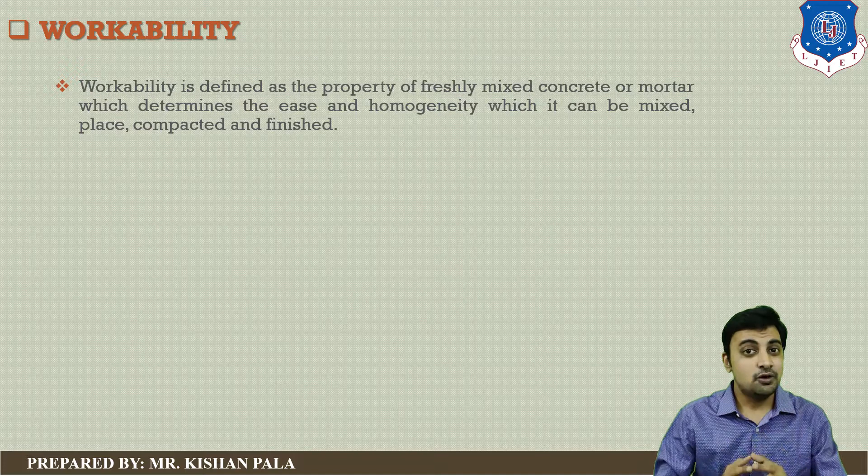Here you can see on your screen what is workability. Workability is regarded as a fresh property. Workability is defined as the property of freshly mixed concrete or mortar which determines the ease with which it can be mixed, placed, compacted and finished. Now let us understand the factors affecting the workability of the concrete mass.

There are many factors affecting the workability of the concrete mass. Let us discuss them one by one in detail. We will start from water content.

Water content is one of the important factors affecting the workability of concrete, because adding water gives you higher workability. But if you talk about the strength of the concrete, increasing the water content beyond a certain amount has a negative effect on strength. So we have to be careful adding more water to achieve higher workability, because this will affect the strength of the concrete mass. With increasing water content, you get higher workability but decreasing strength.

Second factor is mix proportions. The mix proportions of all ingredients in different ratios affects the concrete mass. For example, taking the aggregate-cement ratio: if you use a high aggregate-cement ratio, you get low workability, because workability is directly related to the particle size of the aggregates and the arrangement of all ingredients in the concrete mass. So increasing the aggregate-cement ratio gives low workability. If we take a low aggregate-cement ratio, meaning a rich mix, you will get higher workability. So mix proportions of all ingredients affect the workability of the concrete mass.

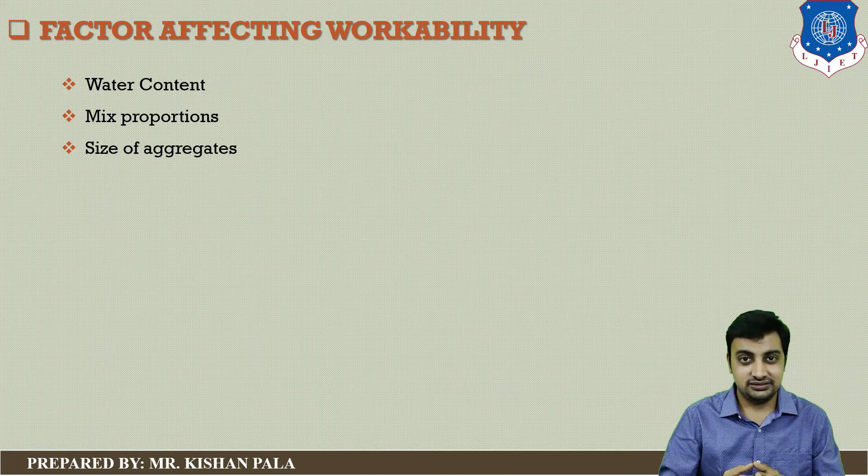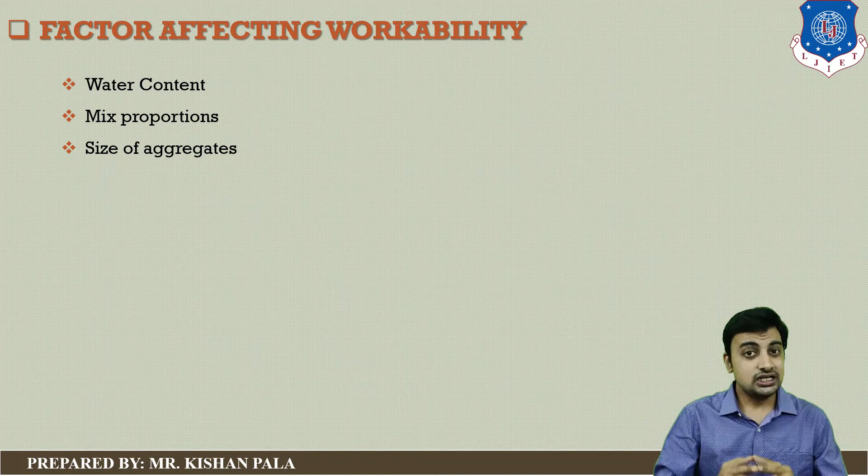For example, if we take a lesser size of aggregate, it has higher surface area, meaning it requires more water, which gives you lower workability. On the opposite side, if we use a larger size of aggregate, there is lesser surface area, requiring lower water consumption, giving higher workability. So the size of the aggregate affects the workability of the concrete mass.

But if you want high workability, you can use a composition of different sizes of aggregate, and you will get the best composition of the concrete mass, giving higher workability compared to a normal mix.

Next, if we talk about the shapes of aggregates, we have different shapes available: rounded aggregate, irregular aggregate, angular aggregate, flaky aggregate, and elongated aggregate. These affect the fresh property, or workability, of the concrete mass. If you use rounded aggregate, this gives high workability, but if you use angular or irregular shaped aggregate, that gives lesser workability compared to rounded aggregate.

There is an issue related to bonding with rounded aggregate. If we use rounded aggregate, the bonding will be less, and less bonding gives lesser compressive strength. So for higher workability we can use rounded aggregate, but we get low bonding strength of internal particles and won't get high compressive strength. So in high strength concrete we cannot use rounded aggregate, but we can increase workability by using rounded type aggregates.

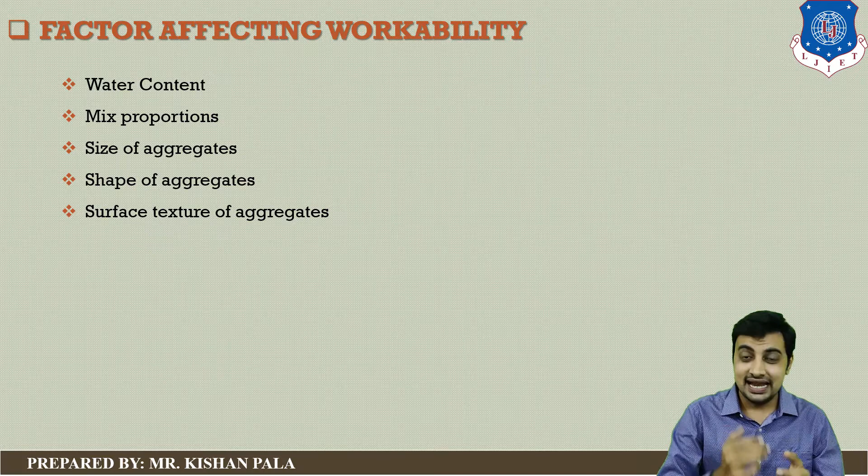Next point is surface texture of the aggregates. The surface texture affects the water requirements of the concrete mass. We have mainly two types: glassy and rough texture. If we use glassy type texture, the concrete mass requires less water consumption, and the internal friction of the aggregate will be less, giving higher workability. On the opposite side, rough aggregates require high water consumption, and the internal friction will be high, giving lesser workability of the concrete mass.

Our next topic is grading of aggregates. With proper graded aggregate, you can increase the workability of the concrete mass, because lower particles will fill the gaps of higher particles, and further fill the smaller particles. So the bonding of the composition will be good, and you will get higher compressive strength as well as higher workability. So with proper grading of the aggregate, you get higher workability as well as good hardened properties and high durability of the concrete mass. Proper grading should be considered while mixing concrete.

Next point is use of admixtures. Nowadays in construction we have lots of admixtures available, like plasticizer, super plasticizer, and others, and pozzolanic materials like fly ash. You can utilize these materials and get high workability along with high compressive strength, which is also beneficial for the durability of the concrete mass. This is an important point to consider for factors affecting workability.

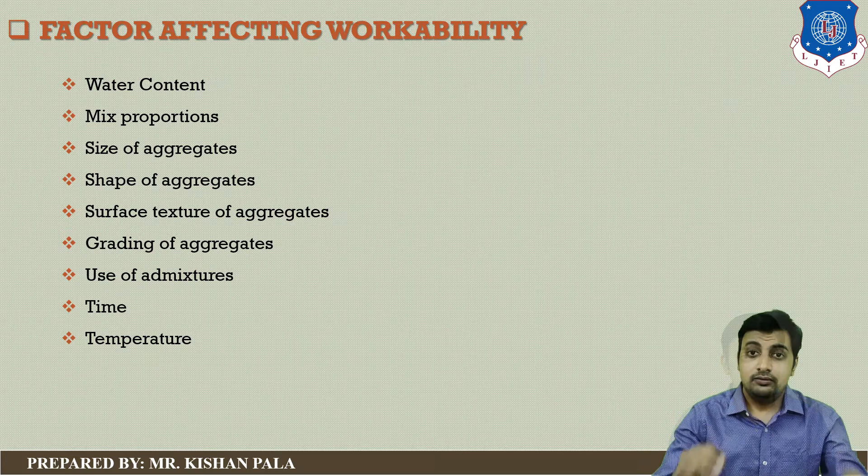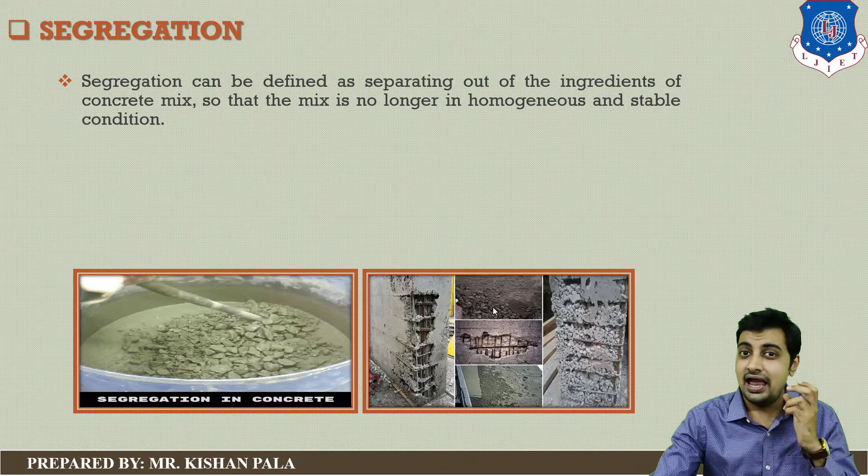This will affect the fresh property, strength, and durability of the concrete mass. In case of dry mix, the coarse aggregate separates out from the mix. In case of wet mix, the paste separates out. And in the third case, with excess water in the mix, the water separates out. There are three types of situations that can happen with segregation. So segregation is the separating out of the ingredients from the concrete mix.

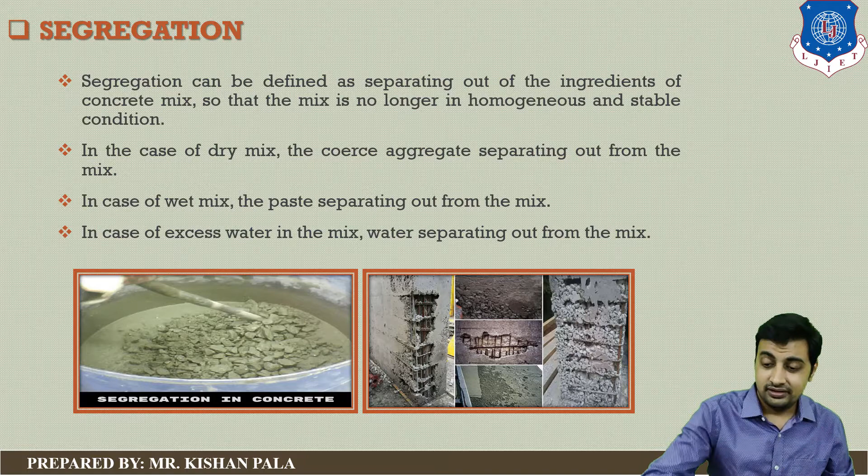Let us discuss the causes of segregation. Which are the reasons for segregation? First one is badly proportioned mix - your design is not proper. In that case, the segregation problem may be created in your concrete mass.

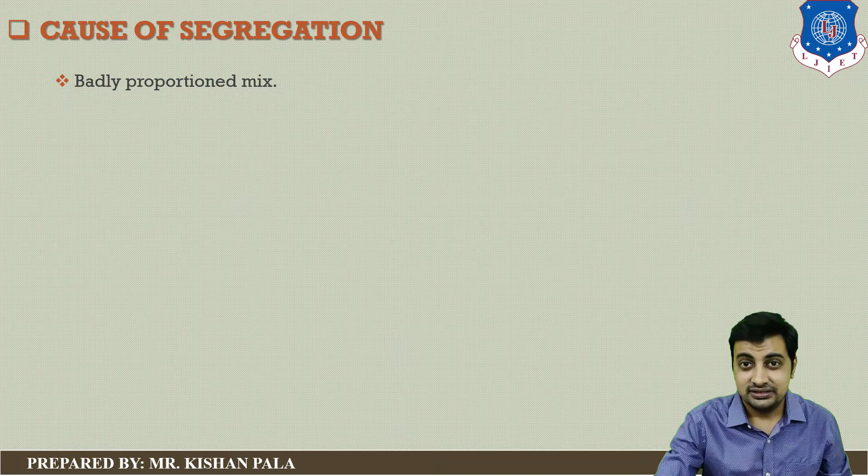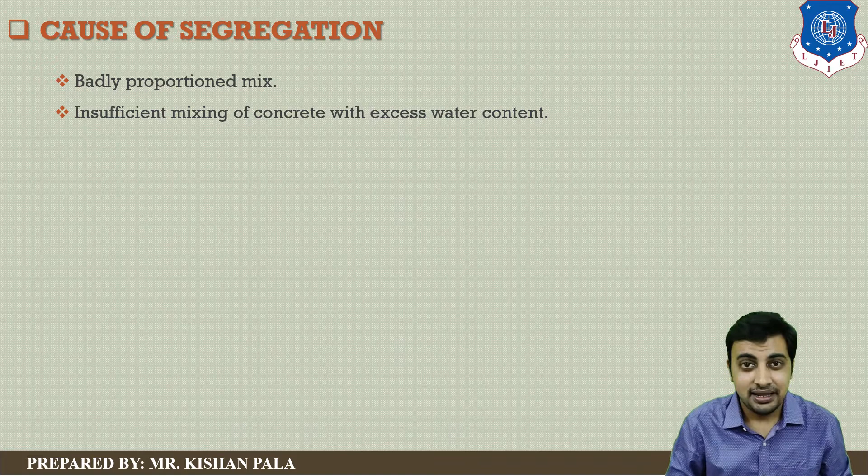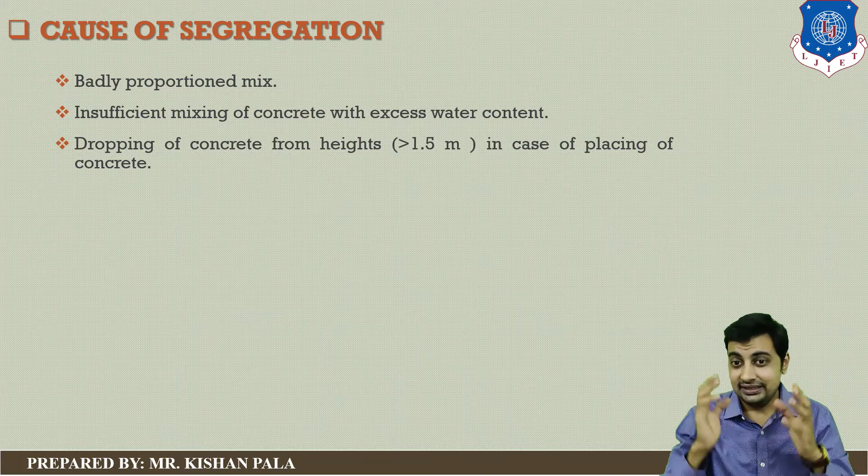In the second case, insufficient mixing of concrete with excess water content - segregation may happen. In the third case, if your concrete is dropping from a height greater than 1.5 meters, that can happen. The next reason is discharging the concrete against obstacles like reinforcement bars and formworks. So if you are concreting and there is congested reinforcement, that situation at your existing site may cause segregation.

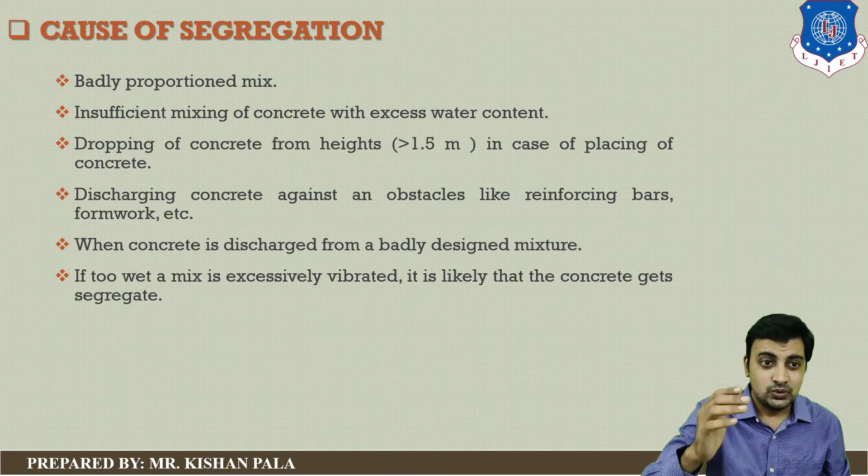The next reason is when the concrete is discharged from a badly designed mix - if your design is not proper as per Indian standard or any other method, segregation may happen. The next is if the wet mix is excessively vibrated, it is likely that the core concrete gets segregated. So if your vibration is not done in the proper manner, this is one of the reasons for segregation. These are the causes of segregation.

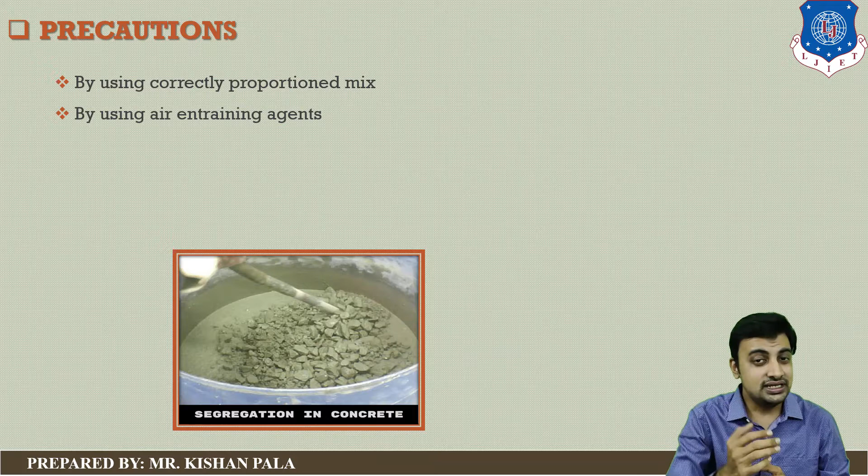Now let us discuss how we can prevent segregation and which precautions we can take. First one is by using a correctly proportioned mix. You can decrease this segregation situation with proper design mix by using air entraining agents. As we have already discussed, the air entraining agent introduces tiny air bubbles into your concrete, which increases the workability.

The next one is by using workability agents, and by reducing the height of drop of concrete - the placing of concrete should be done at a height less than 1.5 meters. Next, at any stage if segregation is observed in the initial stage, it should be remixed in a short duration to make the concrete homogeneous again. This way you can eliminate the segregation of concrete.

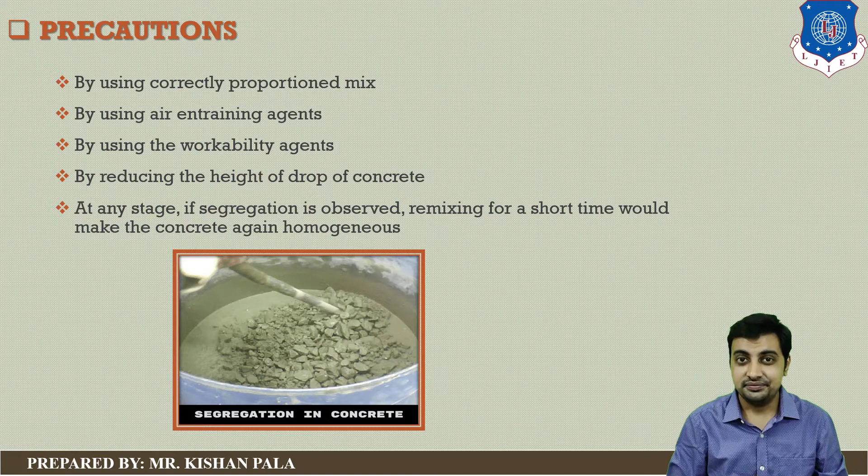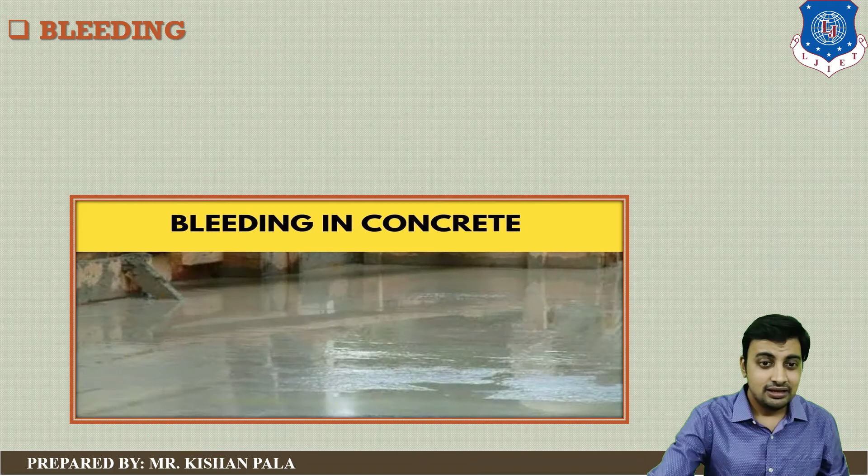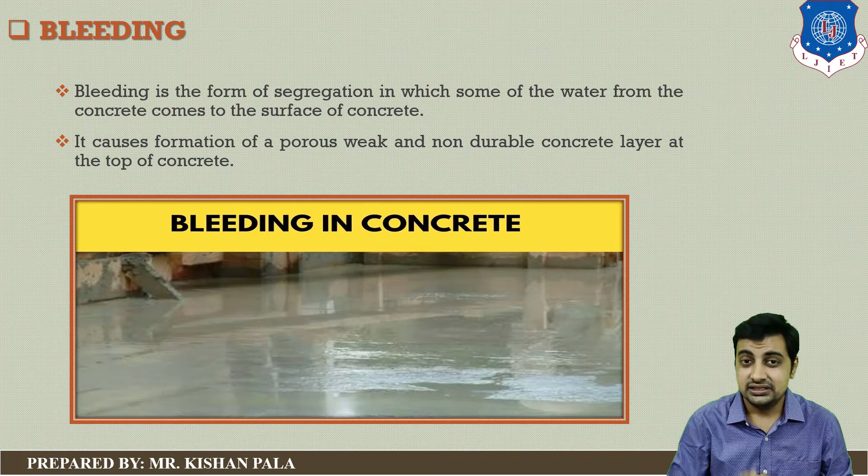Next is bleeding. Bleeding is one form of segregation. Let us discuss what bleeding is. Bleeding is the form of segregation in which water comes out from the concrete mix. It causes formation of a porous, non-durable concrete layer at the top of the concrete. You can see on your screen - this is bleeding.

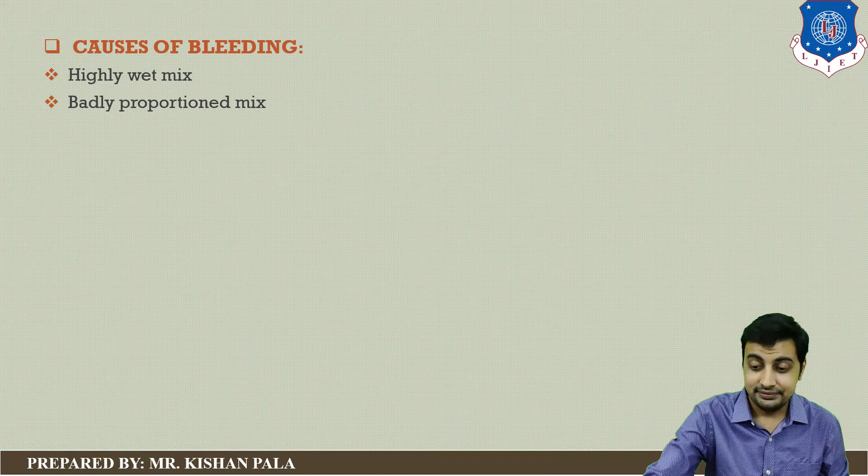Which are the reasons for bleeding? First one is highly wet mix. Second one is badly proportioned mix, in that case bleeding may happen. Third one is insufficiently mixed concrete.

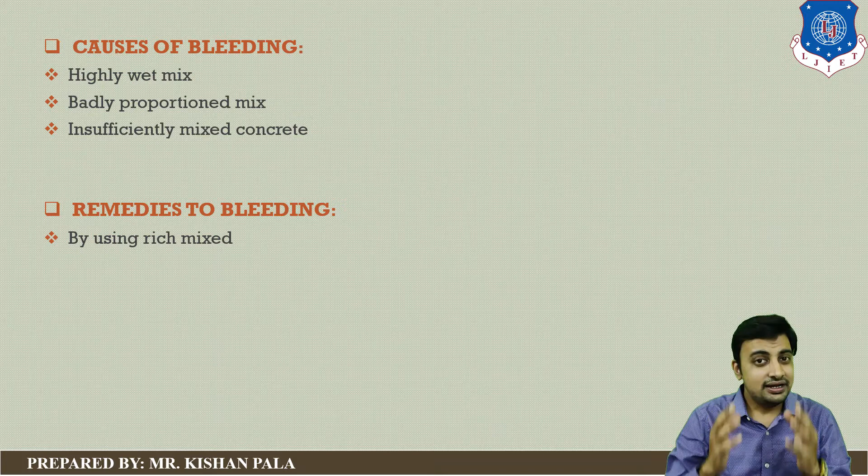And how can we resist against bleeding? First one is by using a rich, design mix concrete. You can decrease the possibility of bleeding by using finer cements, because larger content of coarser aggregate is one of the responsible factors for bleeding. If you use finer particles, there is decreased possibility of bleeding.

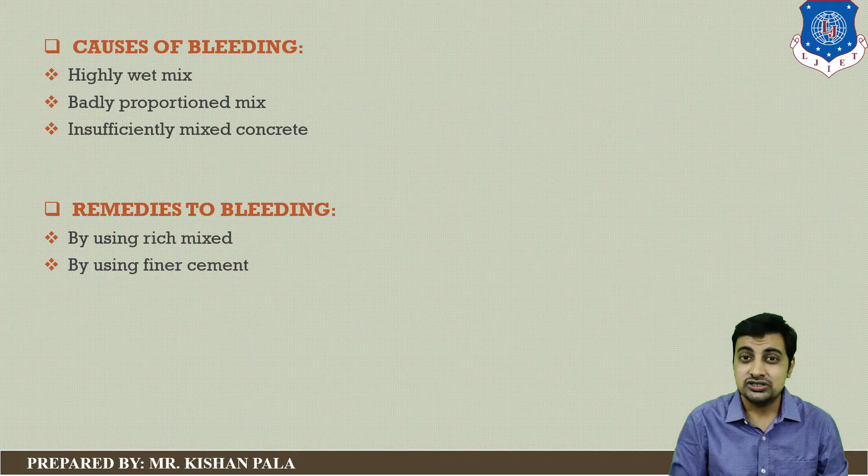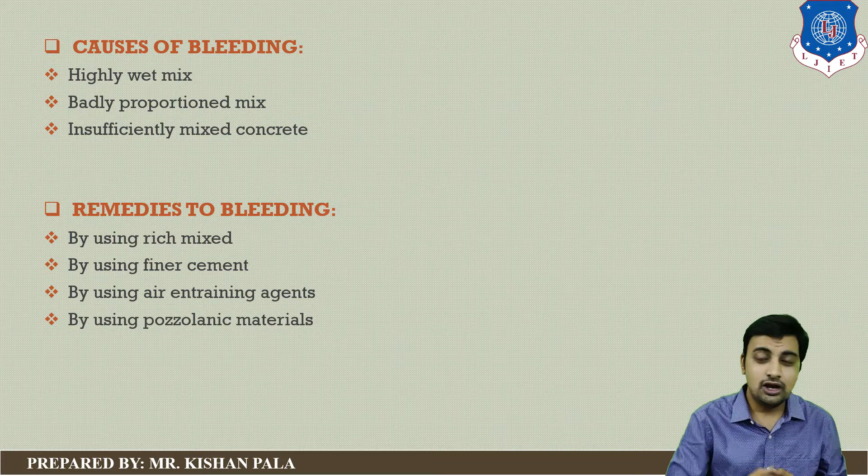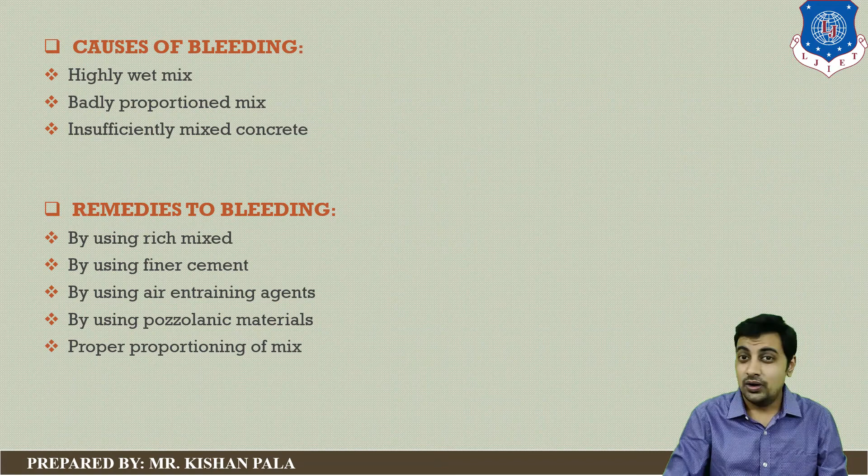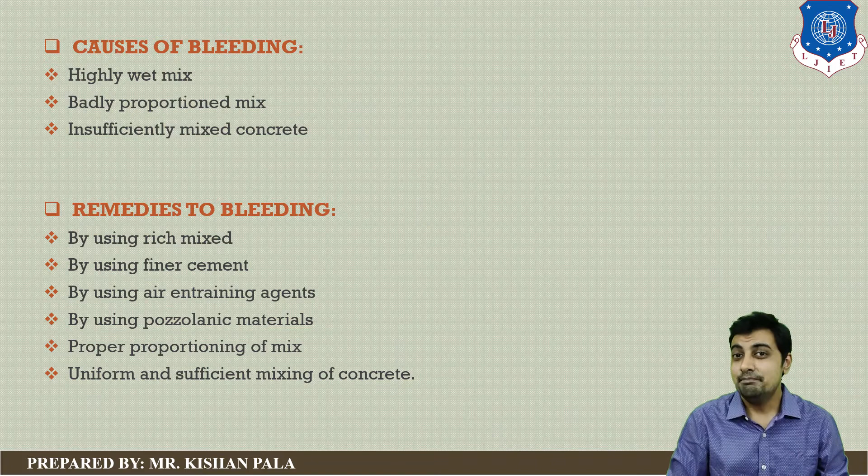The next one is by using air entraining agents, and you can also decrease bleeding by using pozzolanic materials like fly ash and others. You can decrease it with proper proportioning of the mix as per the Indian standard method or any other. And next is uniform and sufficient mixing of the concrete, which decreases the possibility of bleeding. These are the main points.

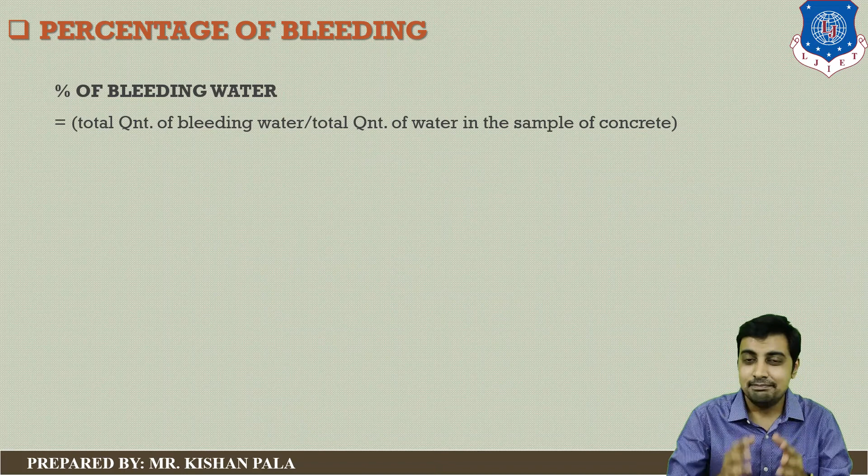We can calculate the percentage of bleeding. Percentage of bleeding is calculated by the total quantity of bleeding water divided by total quantity of water in the sample of concrete. You can easily find out the percentage of bleeding this way.

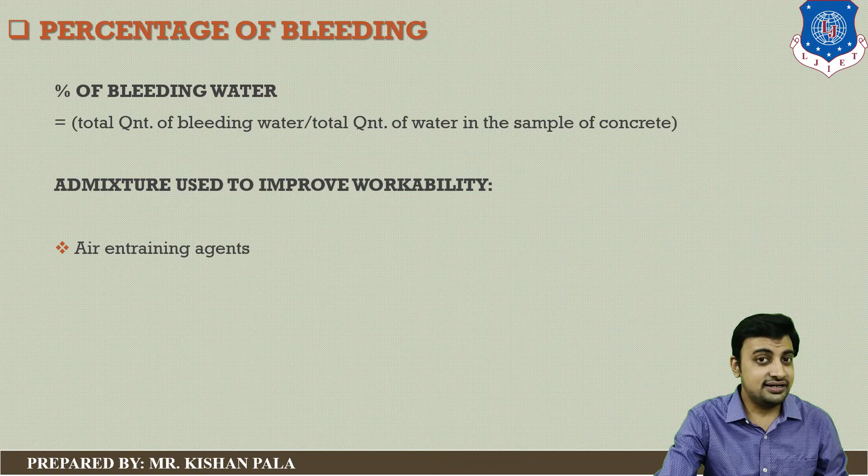Admixtures used to improve workability: first one is air entraining agents, second one is water reducing agents, plasticizers and super plasticizers, third one is finely divided materials. With these admixtures, you can improve the workability of concrete.

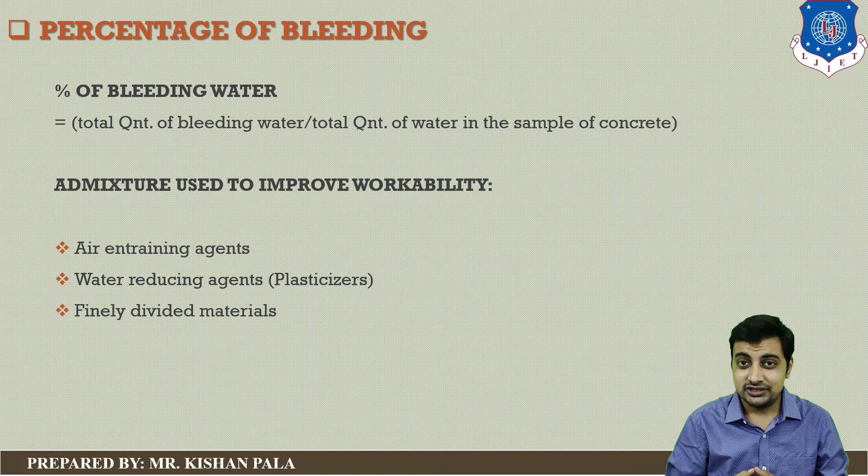So this is all about the fresh properties - you can say the workability of concrete. Thank you.